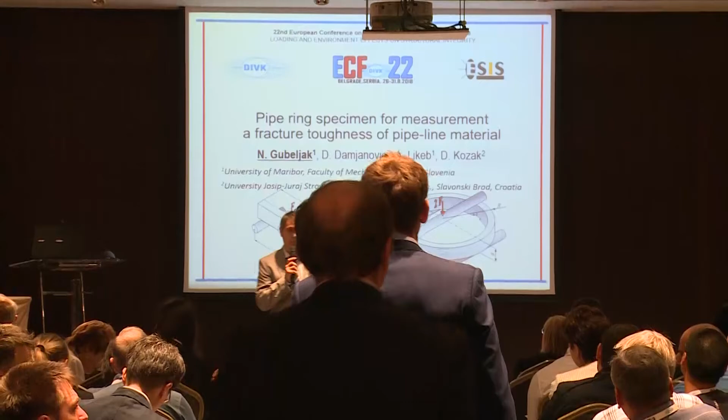I would like to say a few words about a man who is not with us, but who actually initiated this research topic for me and my colleagues. This work gave me the opportunity to meet nice people across Europe from different research centers like GKSS, Helmholtz, and others, and many of you too. Thank you, it's really nice to be here today.

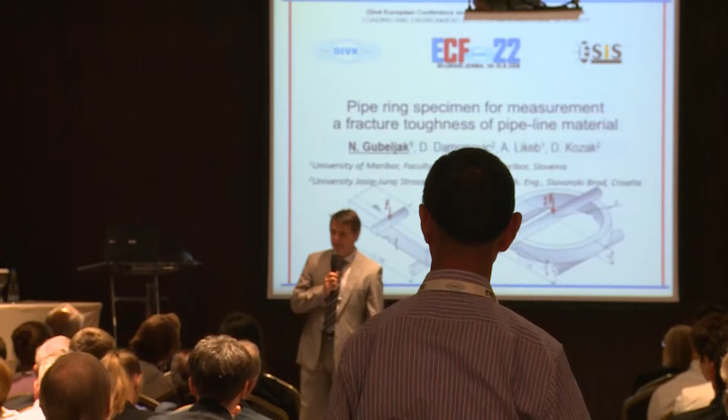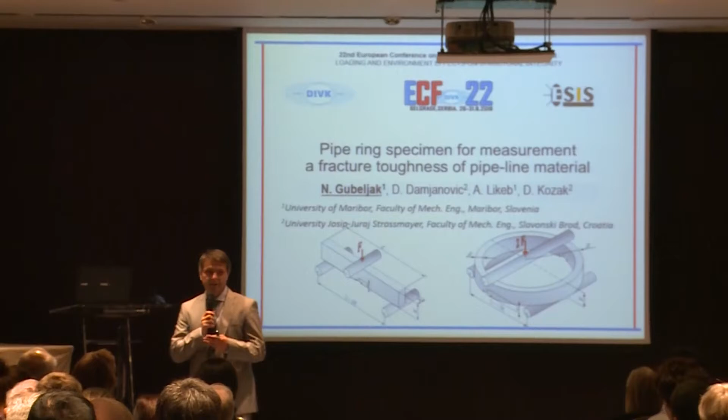My contribution is joint work done together with Professor Dražen Kozak from Slavonski Brod, so it is already international. He gave a presentation yesterday as an introduction, but this goes beyond that with nice results which we hope will be useful in the future. This is joint work with his PhD student, Dr. Damjanović, and my PhD student, Andrej Likeb.

The idea is presented in the first slide. You know that we use the standard 3-point bending specimen in order to determine the fracture toughness.

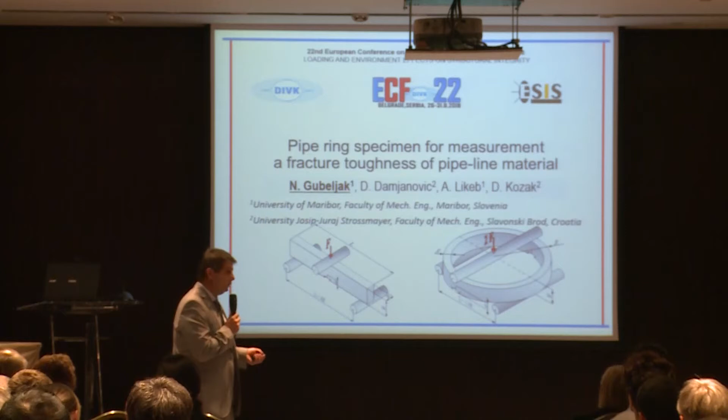But this idea is about how to measure the toughness of pipelines in the case when there is a notch or crack in the longitudinal direction, because often the crack propagates along the pipe, so you have a problem with the toughness of pipelines, and accidents happen.

It happened in San Bruno, California. Here you can see the damage caused by a pipeline explosion in Taiwan. Many different accidents have happened with pipes, and one of the reasons is related to material properties.

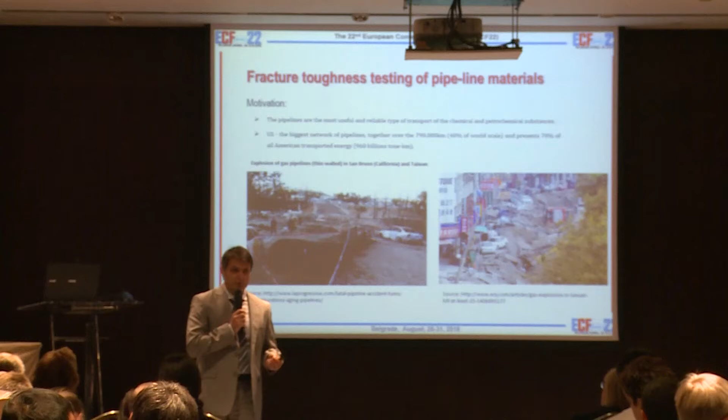So this is why it is important. Of course, people after testing made the analysis of how and why it happened, and they recognized that if the toughness of materials is known and can be calculated, we can use the right thickness of material.

Of course, there is always the question of price. In this case, we can find and make a safe pipeline structure. The problem with pipes is that very often they want to reduce the material weight, so they have low thickness relative to diameter, and in this case it's very hard to make a standard specimen from this pipeline wall.

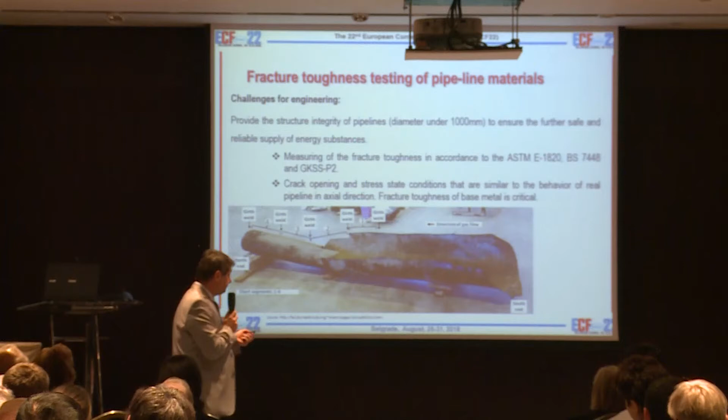We know and use different procedures for fracture toughness determination. One of these, published more than 20 years ago, is the GKSS P2 procedure. But we are also working within standards now, trying to find alternative methods.

Here you can see that this axial longitudinal crack is actually arrested on the pipe. This means that for this pipe we have enough toughness that the crack is arrested and the damage is only local. This is actually what we want if an accident happens, because the damage will be as small as possible. This idea was patented in Moscow, Russia, with Professor Matvienko from the Russian Academy of Science, also one of our collaboration partners.

He also proposed that we do some tests in the axial direction, and then we decided to cut specimens. First we started with 4-point bending, and then we actually used 3-point bending and tried to compare it with the standard bend specimen.

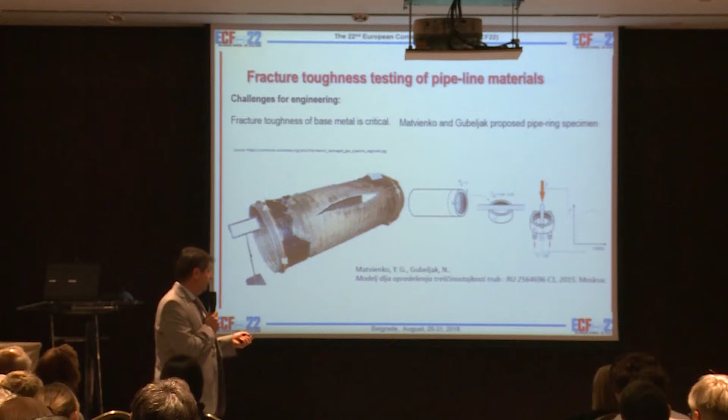Now I will talk more about the comparison of these results and how we can apply this. First, how do we prove that the toughness measured on a 3-point bend specimen is the same or similar to that of a pipe ring specimen?

For this, we use the same material. First we cut it by spark eroding from the plate, to avoid residual stresses, and then we made this geometry. We keep the width at 2 times the thickness, similar to the standard 3-point bend specimen, and we also use a distance between pins of 0.9 times the diameter, with different thickness-over-radius ratios. Of course, the force applied is doubled, because it is like two 3-point bend specimens.

We want to discover the difference between notched and fatigue pre-cracked pipe ring specimens. Why? Because if you're in construction somewhere in the middle of Russia, you have no possibility to have a servo-hydraulic machine for making a pre-crack. In this case, it's very useful to have the notch. If you can measure fracture toughness by notch, you get very fast results of toughness, and this can be used in calculation, so you can check the material properties from the delivery.

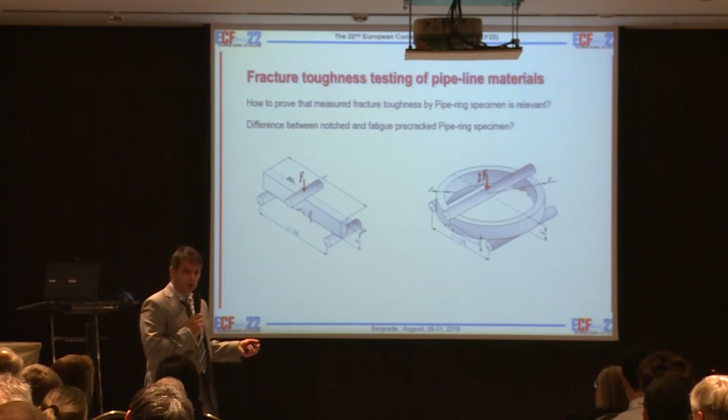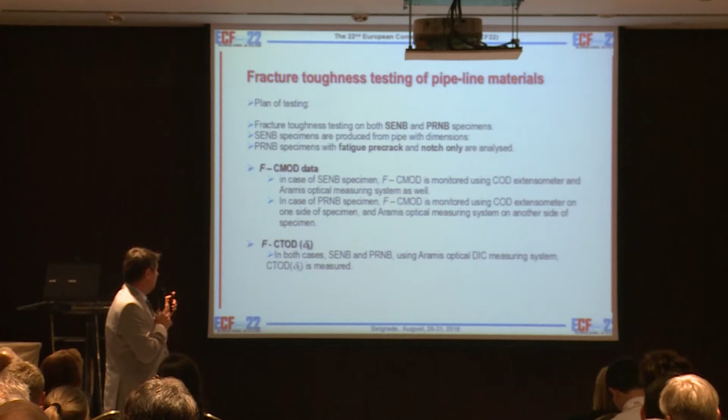The procedure is actually very similar to the standard procedure. We use the pipe ring specimen and 3-point bend specimen. For the 3-point bend specimen we made the fatigue pre-crack, and we also did one group of pipe ring specimens with the fatigue pre-crack, and one group with the notches.

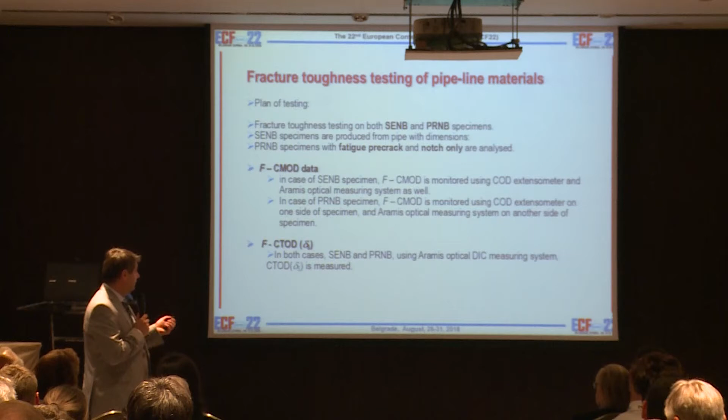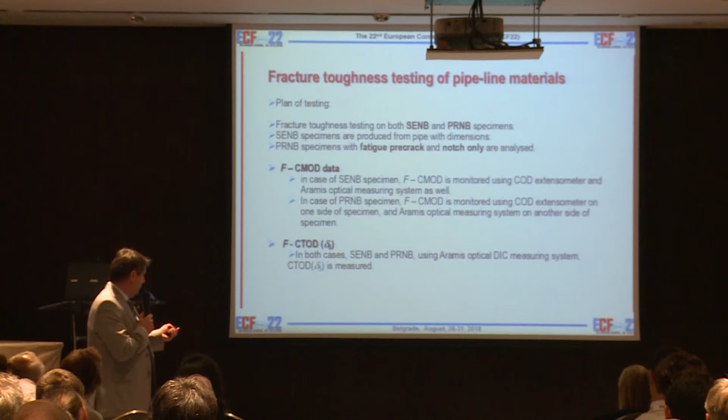During testing, we first use the standard procedure for pre-cracking so we don't get too large a plastic zone. Similar to the pipe ring specimen, we collect data like crack force and crack mouth opening displacement. Because we have 2 sides on the pipe ring specimen, on one side we put the ARAMIS equipment for digital image correlation, and on the other side just a COD clip gauge. With ARAMIS it's also possible to measure - this was the influence of my director at the Institute GKSS, Professor Karl-Heinz Schwalbe. He developed delta 5 to measure toughness, because in this case you don't need a shape function - you can measure toughness directly without knowing the shape. We measure this using the delta 5 technique.

First, if you're using the notched pipe ring specimen, during loading the first step is like that, then you have blunting, then start of crack propagation. In the 3-point bend specimen we made the Chevron notch, and also in pipe rings, then did pre-fatigue crack front. You can see the crack goes faster during fatigue pre-crack from the inside than from the outside, and here you have a quite homogeneous crack front. This is the data about the diameter and thickness of the pipe.

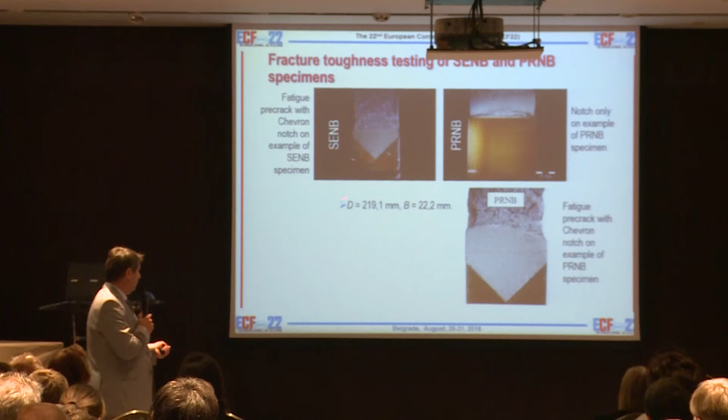This is actually the outside diameter. By using ARAMIS, we make a texture with dots, and the system recognizes the points. We can put in post-testing analysis 2 points at 5 millimeters, 2.5 millimeters left and right, in order to measure delta 5. We also use, on this side, the COD measurement clip gauge, and here this point is also measured by ARAMIS scan, like crack mouth opening displacement.

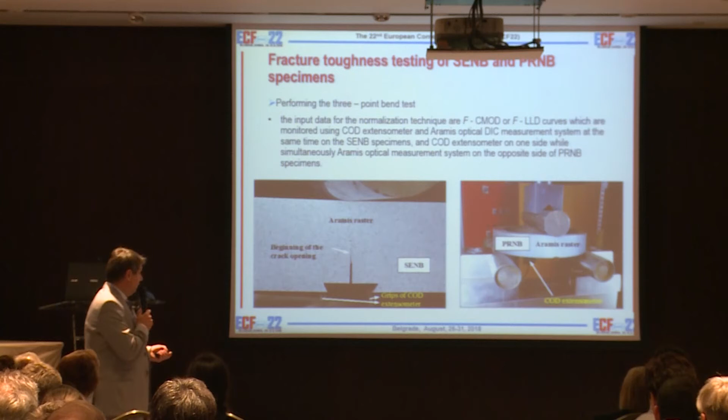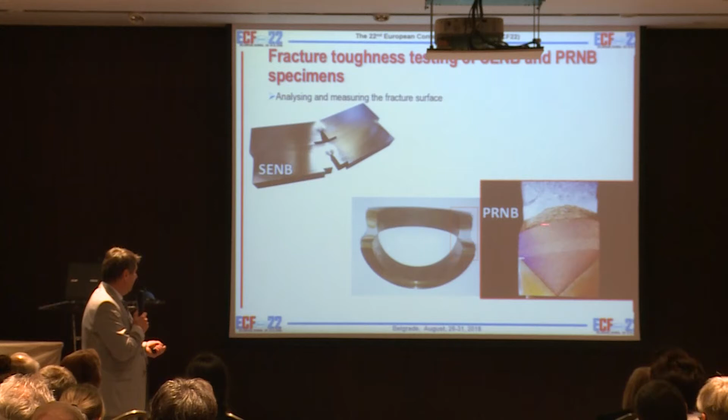All this work was done in a similar way, and this is on the 3-point bend test pieces, and here is our pipe ring specimen with heat tinting in order to mark the crack, start of crack propagation and extension. This is also possible to measure according to standard in 9 points, so we see what we get for initial crack length and what we have on the extension, the final crack front, and then these results also reduce the analysis. Of course this is not a standard result because deviations are more than 10%.

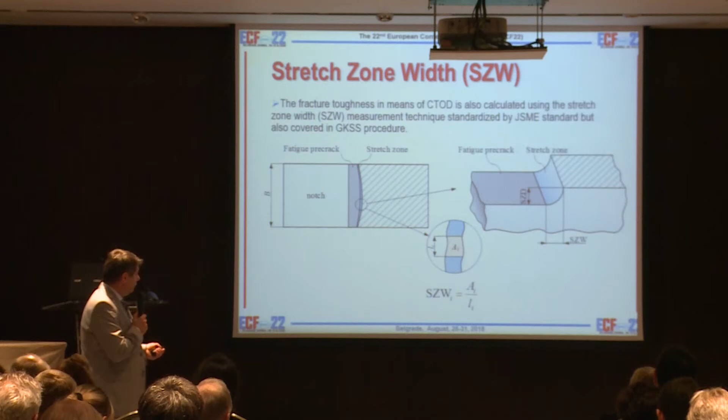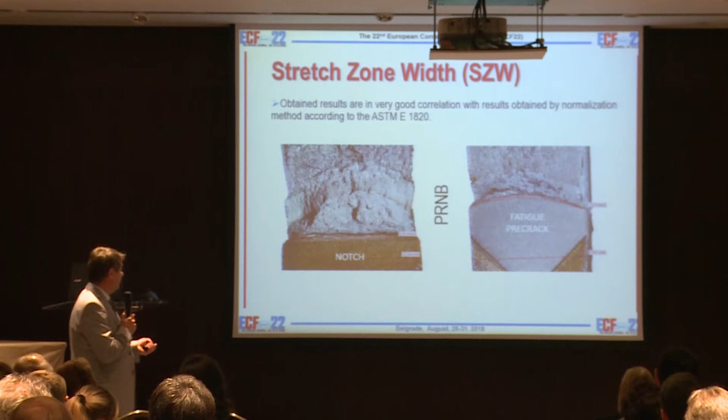We also measured the stretch zone width when we have the fatigue pre-crack, both in the single edge bend specimen, in order to determine the blunting line, because we want to see if the blunting line from 3-point bending can also be used for pipe rings. Here you can see the notch - when you have the notch, there is higher contraction of material. Here is the stable crack propagation, this is the final. And if you have the fatigue pre-crack, this is the blunting, and then here is the final stable crack propagation.

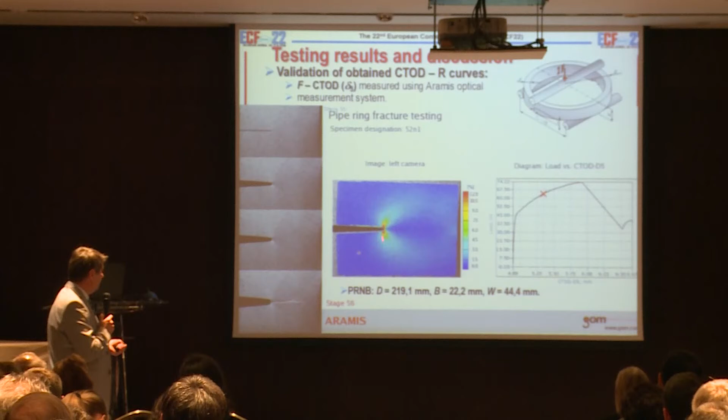So in order to run the test with ARAMIS, you can see here the loading curve. Here are the 2 points at 5 millimeters directly measured, and you can see the crack opening during the test, and then we'll have here, of course, the drop - showing instability of this pipe ring with the fatigue pre-crack.

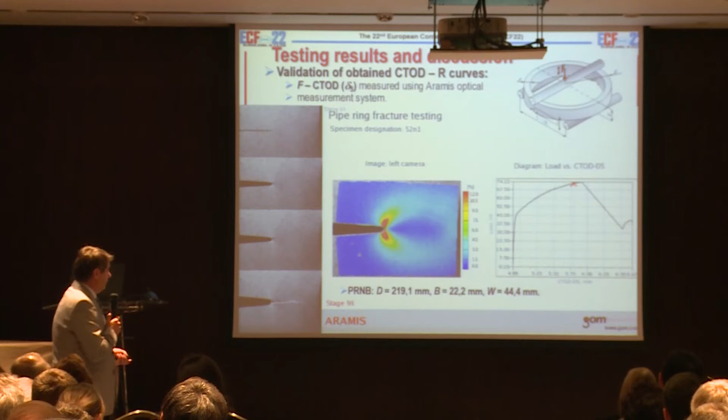So, of course, this is the last point on the curve. Then we stop the test, and we also measure the crack extension, and then do the post-test analysis in order to determine the curve.

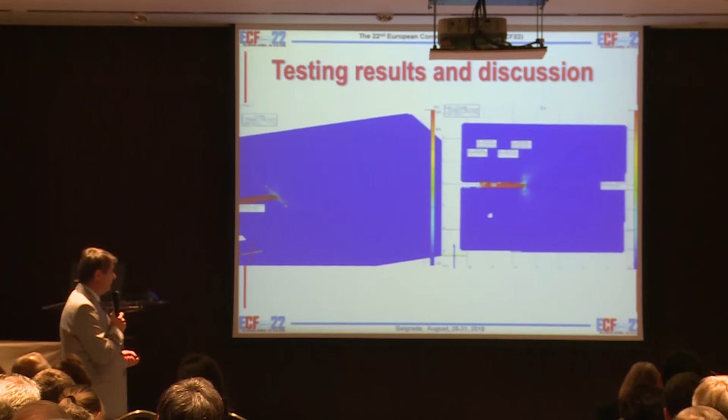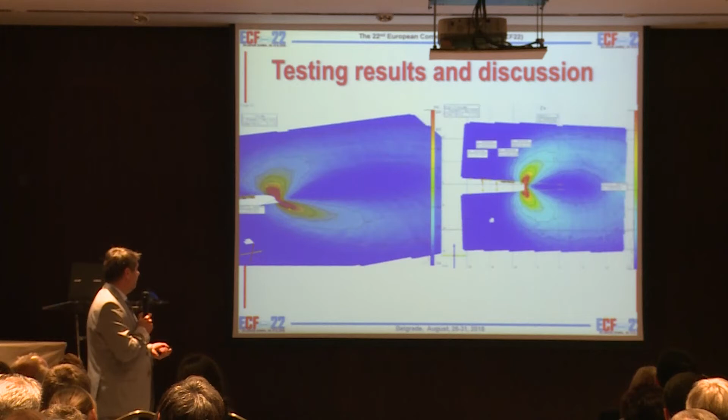Here you can see these 2 points at 5 millimeters displacement. Here is the actual plan view, and here is the actual side view, along with the equivalent strain of the crack during, made by ARAMIS analysis.

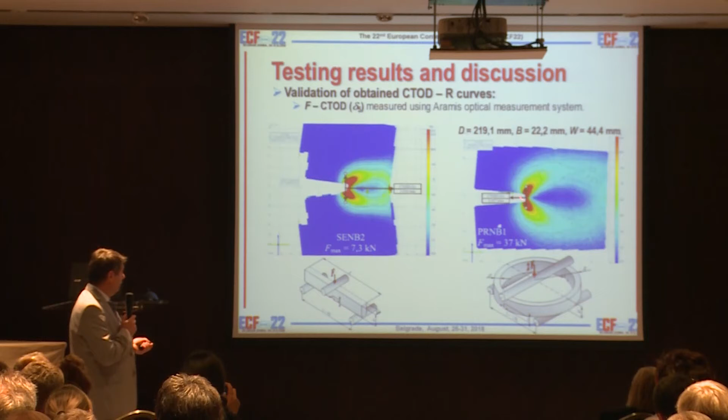So this is now the point of crack initiation. We determined this delta 5 for the single edge bend specimen. It was, of course, 7.3 kilonewtons of force, and here you have the pipe ring specimen, and also at crack initiation it's a much higher force. It depends, of course, on the span distance, and we also get this delta 5 at the crack initiation point.

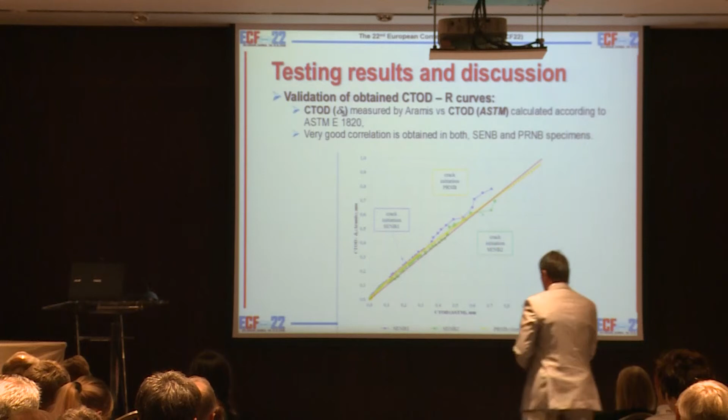So we have the same material. Here you can see the correlation between delta 5 and the CTOD, which we measured from the 3-point bending specimen, but also what we did with the pipe ring specimen. So this is one line here.

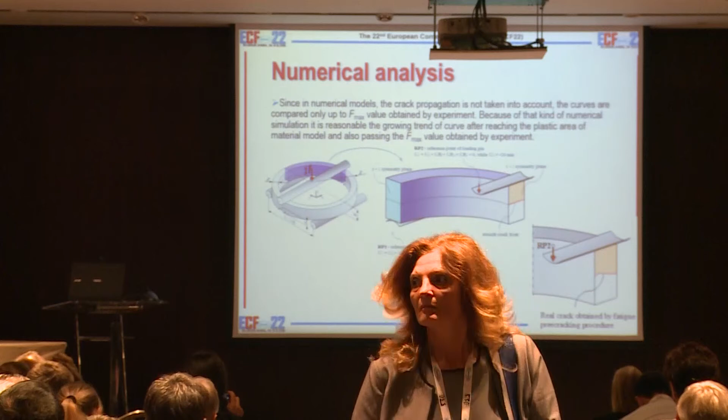The problem is that ARAMIS is not equipment you can have everywhere on a construction site, and this is the reason why we are doing the numerical analysis, in order to determine specimen-based factors that you can use with a single or double clip gauge to measure the crack opening, and then you can also calculate the stress intensity, K1.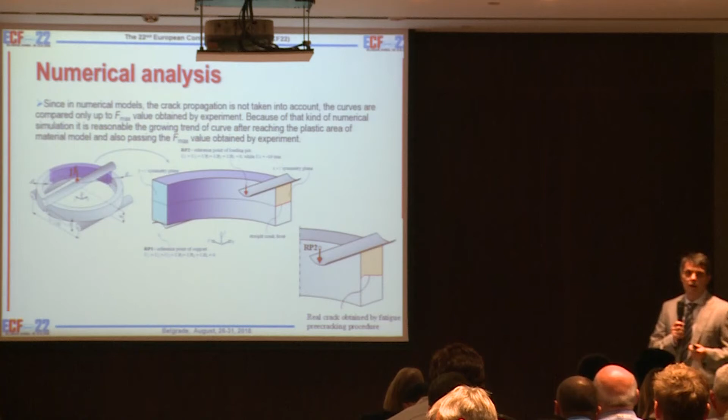In order to do this, we make the model. We use a quarter of the specimen, like here in this color, and we consider two kinds of notches. One is the straight notch, you can see here, straight fatigue crack front, which is not realistic, and one is a realistic uneven fatigue crack front.

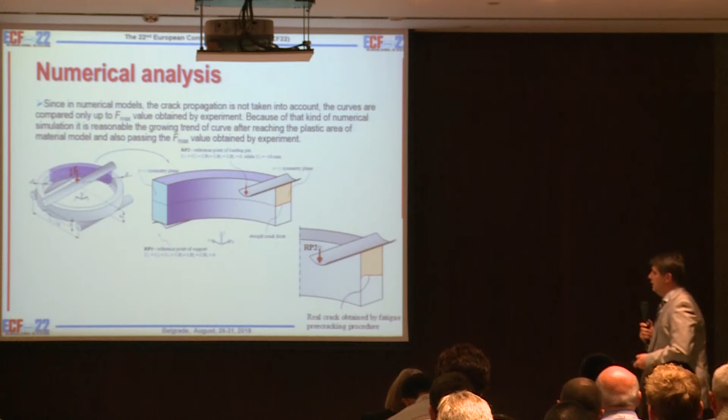So why? Because we want to see what the difference is with these values, and then we can see if this difference makes the specimen useful.

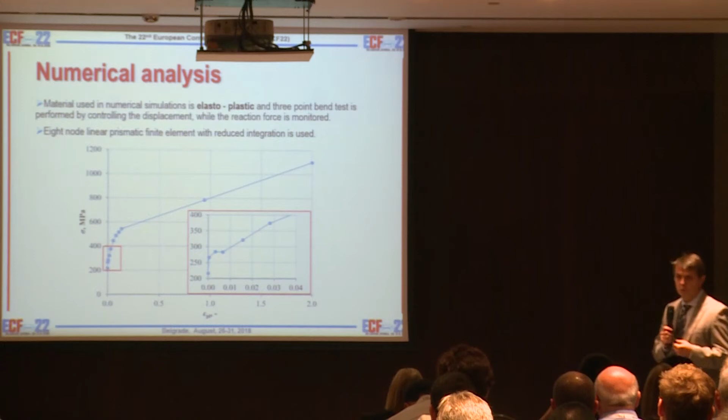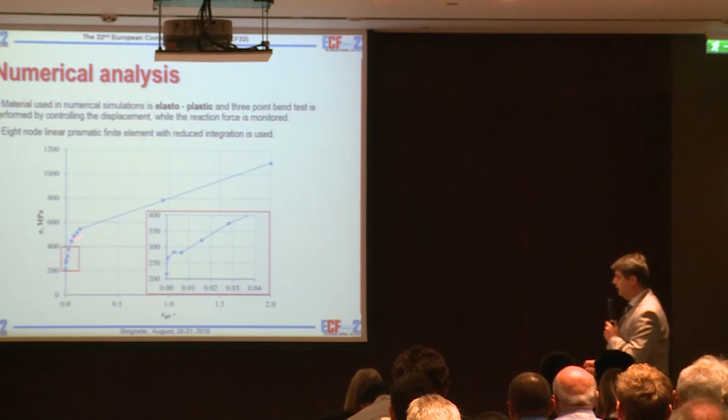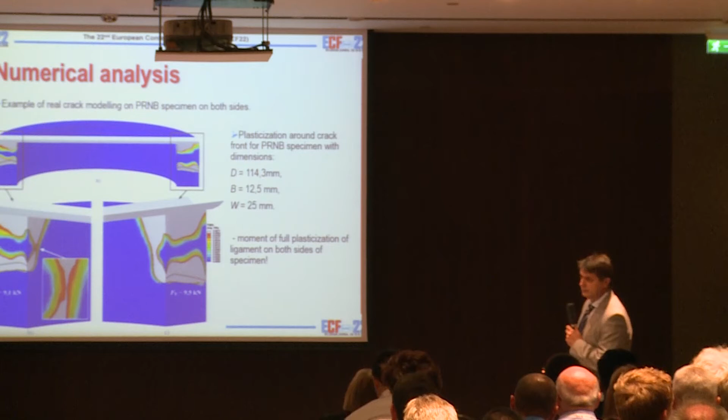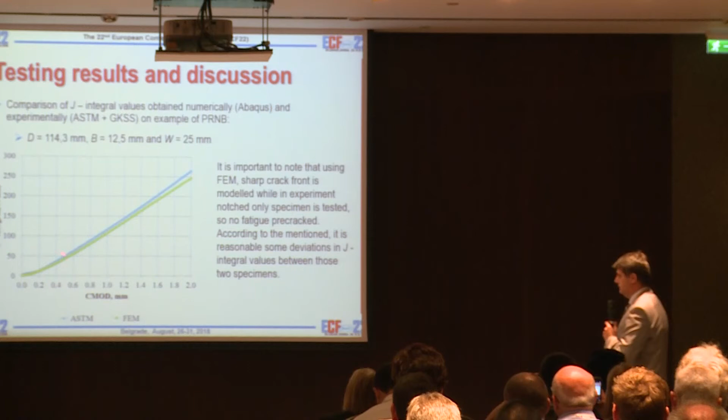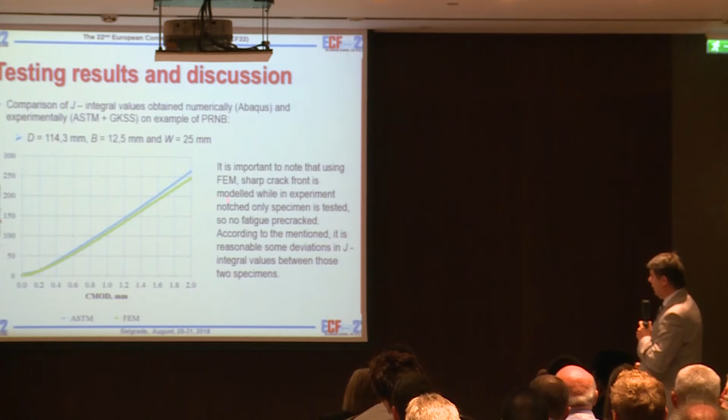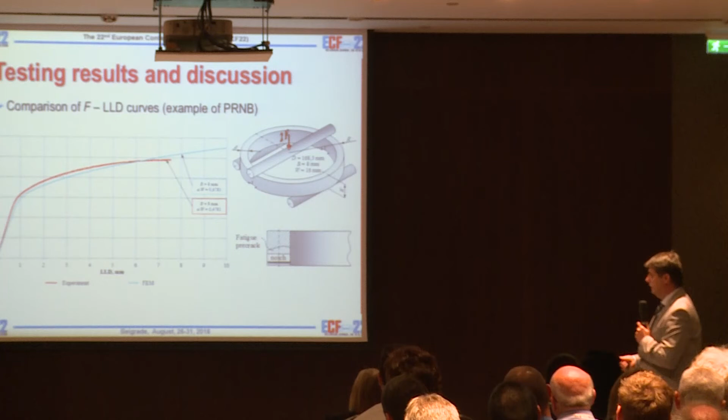So we consider this real fatigue crack front, and just start the loading up to, let's say, maximum displacement, and then we take this value of force. So we have quite good correlation between the two values.

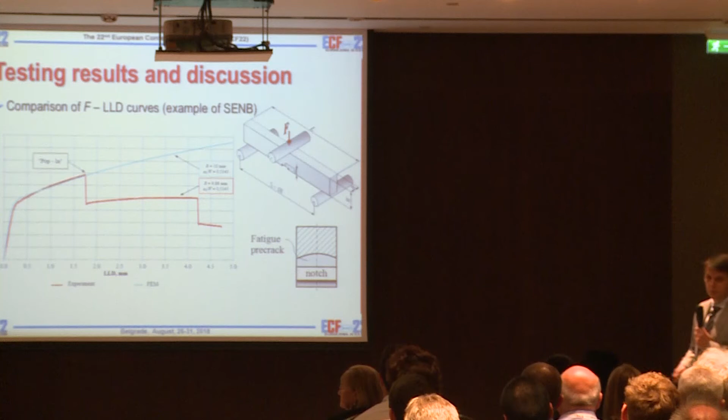So here we want to compare the notch and fatigue crack front. This is the blue line, and this is the average. So we can see that for the same average crack length, here we get quite good agreement between the results. That means it's really possible to use the notched specimen in this case for testing.

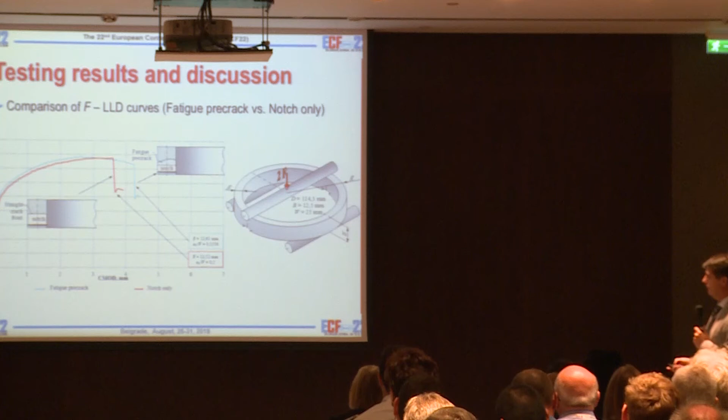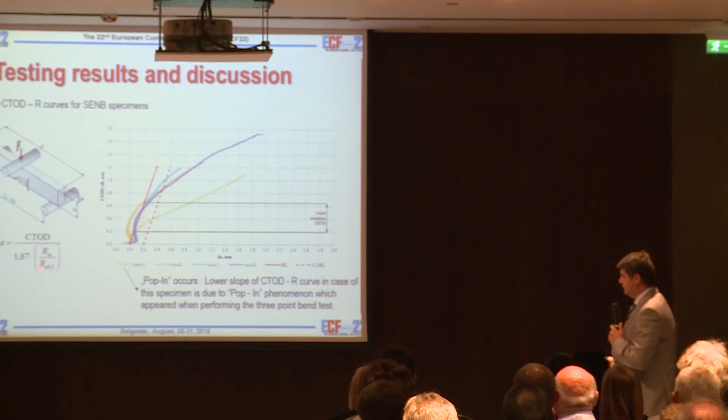So here we have the results of the CTOD-R curves, made by delta 5. This is actually the blunting line, and the formula used is the one in the standard test procedure. So we have the crack initiation area from these different specimens, and also we did the same with the same blunting.

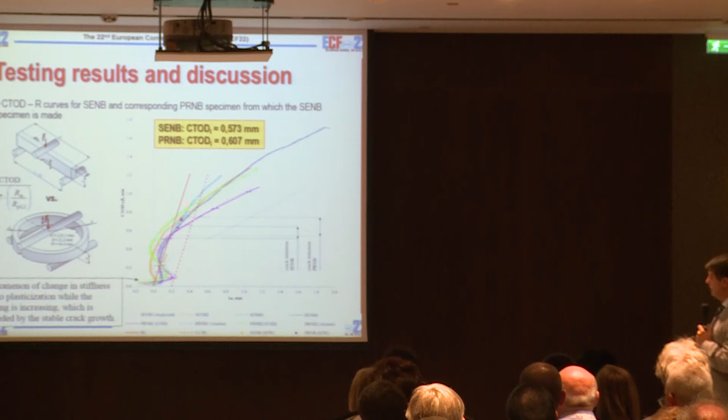And we have also crack initiation, so we can see the difference. Here is the single-edge notch bending, and here is the piping specimen crack initiation, double crack initiation. So it's almost the same range, even getting some higher values of CTOD.

So now we can say that CTOD can be obtained directly by measuring delta 5 CTOD, and as I said, by using ARAMIS or DIC, or some digital image correlation measurement system. And also we see that we have quite similar curves, and also quite near the area of crack initiation.

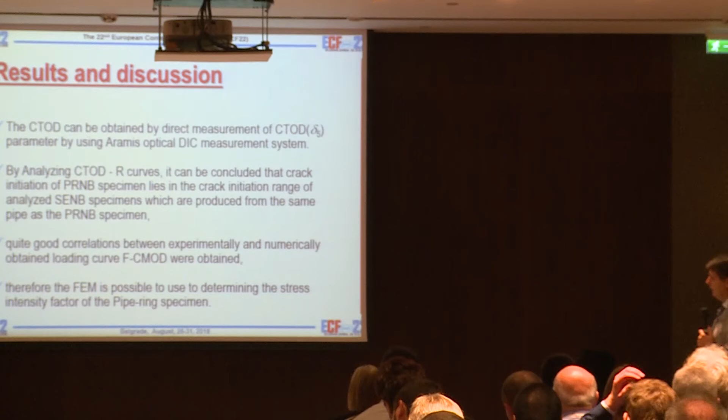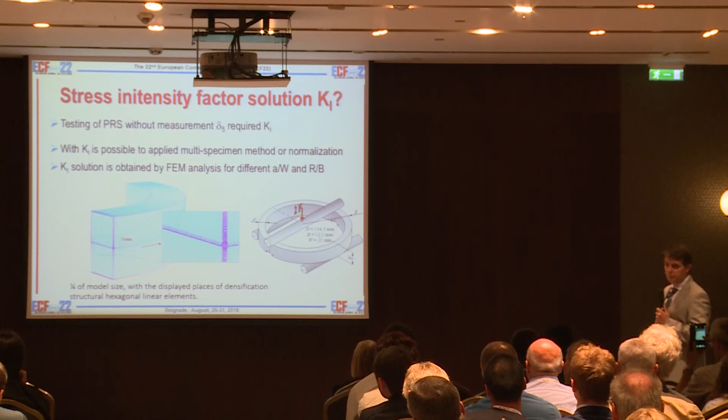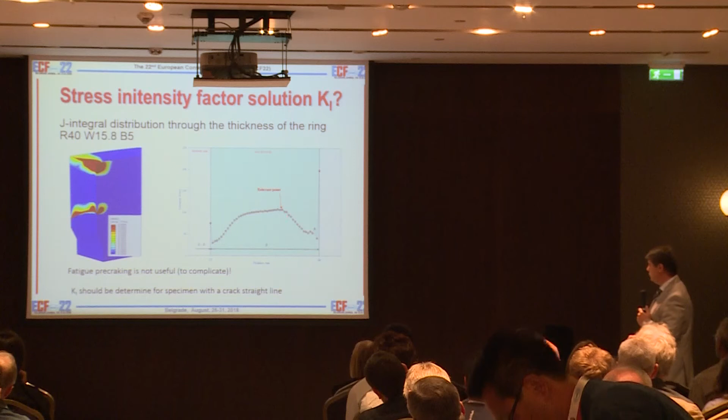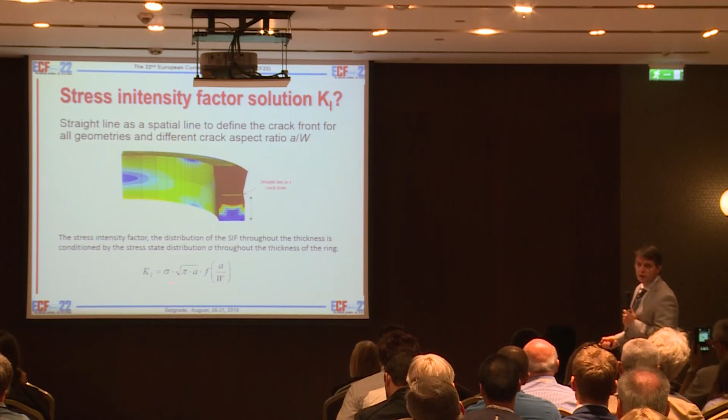Here is the formula used for stress intensity factor for the three-point bending specimen, which is similar, and we use a similar formula here, but we only want to change the shape function and compare this shape function in both cases. Here we have an example with the difference between radius and thickness, with the crack notch, actually notch 0.5 of width, so crack ratio, and we put here a deflection of 0.175 millimeters.

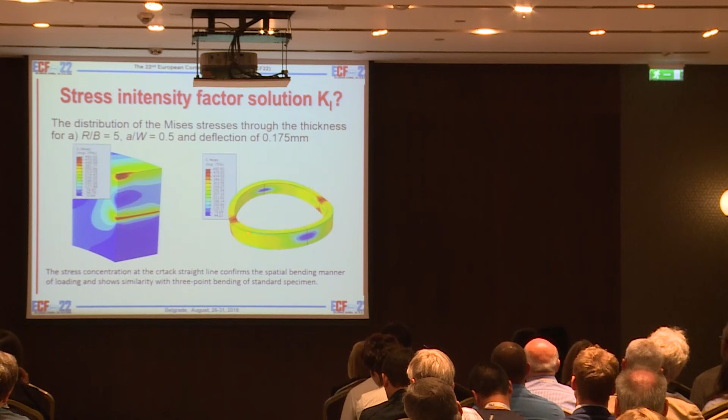You can see for this model what is actually from this stress that we got on the surface, and also what is outside stress and what is in this section. So in this case we got quite symmetric distribution of stress intensity factor, and of course the highest value is in the middle.

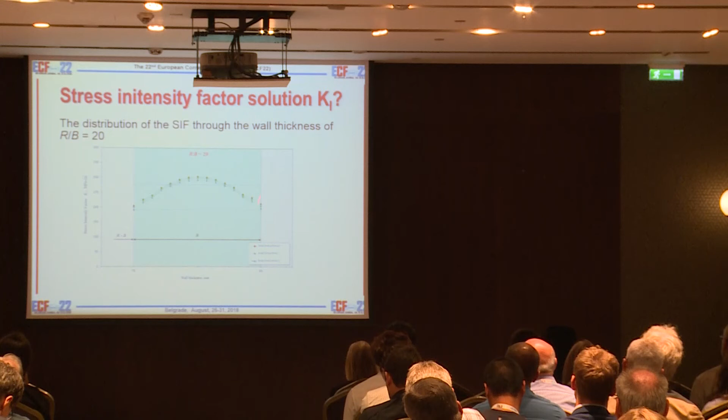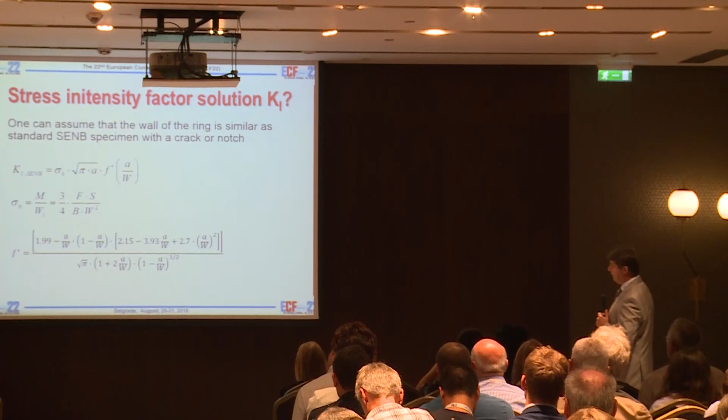Here is the outside, and here is the inside area. So here we use this formula for F star, which you can see here. These values can be compared now with the shape function of the pattern specimen. What we did, we calculated the stress intensity factor at this point and plotted it for different R over B ratio, where R is the outer diameter.

This is one line. This line belongs to 0.45, this one belongs to 0.5, and this green dot is 0.55, like that. So here we have around 8. With the difference between R and B, we have a small drop.

So this is still an investigation in progress. We are assuming, of course, triaxiality problems and plane strain conditions too. But we are going to discover this further in the future.

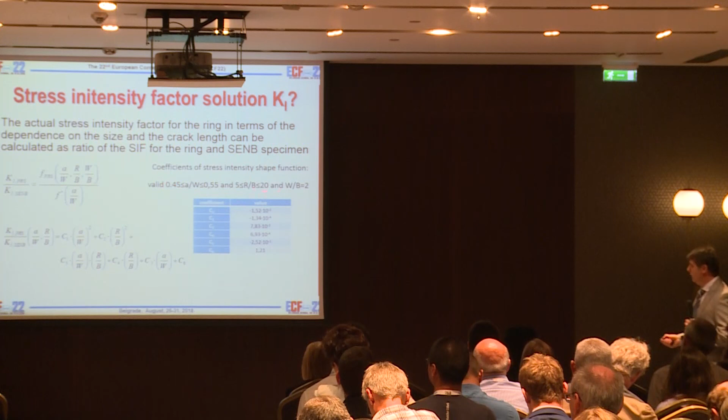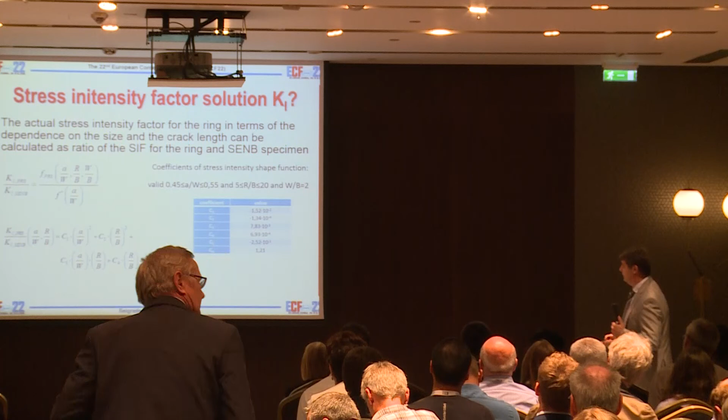So if you now use this for different spectra of ratio between diameter and thickness, you can put this, of course, in this formula, and then you can calculate with the given ratio and given depth what the stress intensity factor values are. When you put in all these values, it's of course quite a simple line.

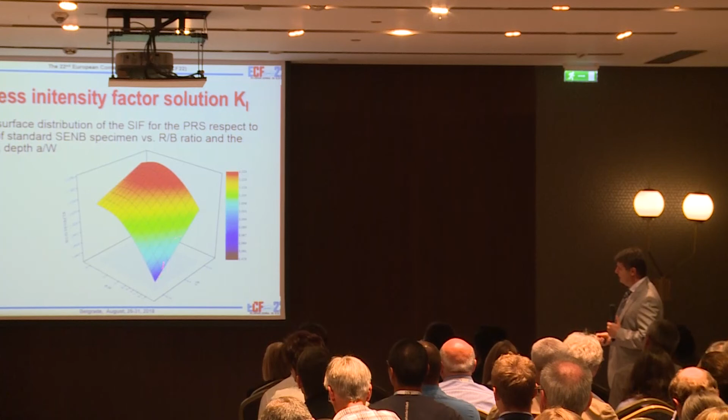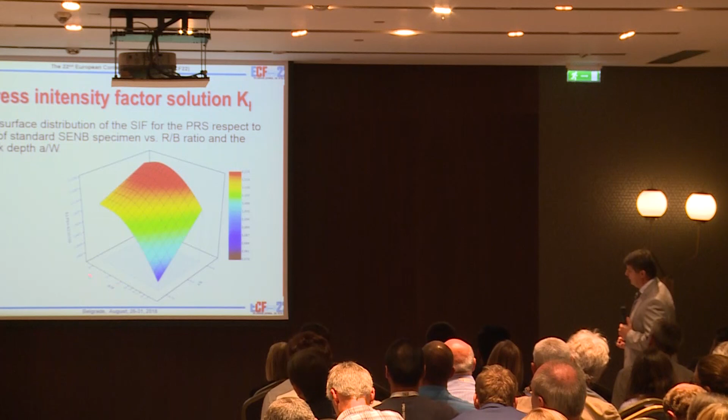Now, this is just in 3D, how it looks, this intensity factor distribution regarding the crack depth from 0.45 to 0.55, and here from different R ratio, from 5 to 20.

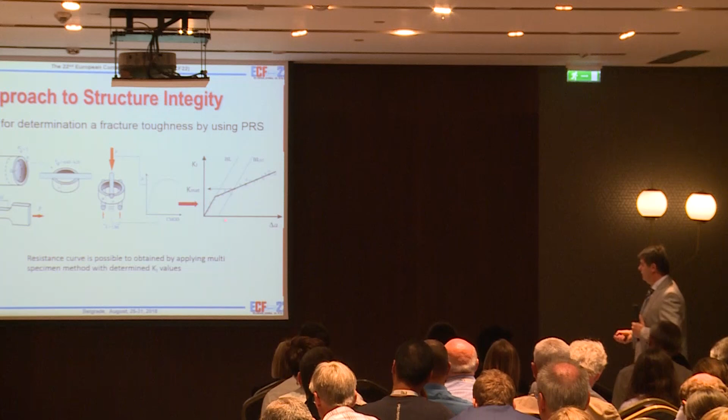So how to apply this in the structure? It's actually easy. You need, of course, to have a tensile test to do, and you need to cut the ring. The ring should be double the thickness of the wall, and then you can make the notch, and then test so that you recognize the amount of displacement, and when you get this curve, by applying these stress intensity factor values, you can also get the point values along the extension.

If you, for example, do multi-specimen methods with different extensions, you can plot the line and tentatively estimate the stress intensity factor.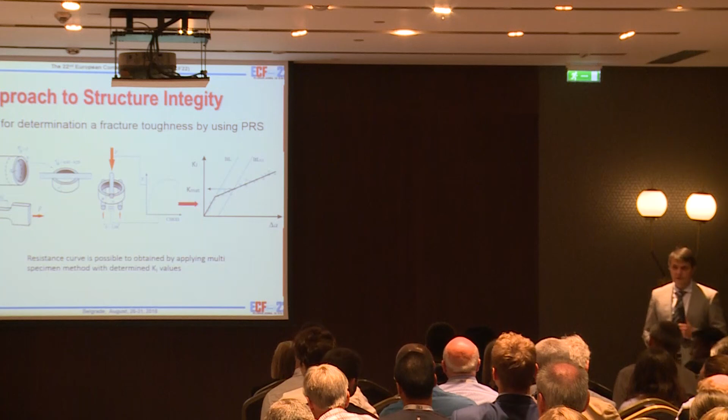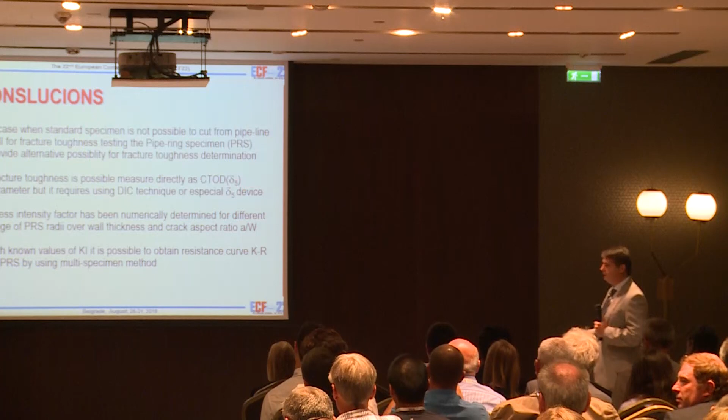So, in conclusion, sorry for this, in conclusion I can say that in the case when a standard specimen is not possible to use, you can use the pipe specimen, cut from the pipe, only a small piece. It's very cheap, actually not costly, and we have now possibility to measure the delta five by using DIC. Then we can also use this stress intensity factor solution, and then go to different crack extensions because of the J integral or the integral for the fracture.